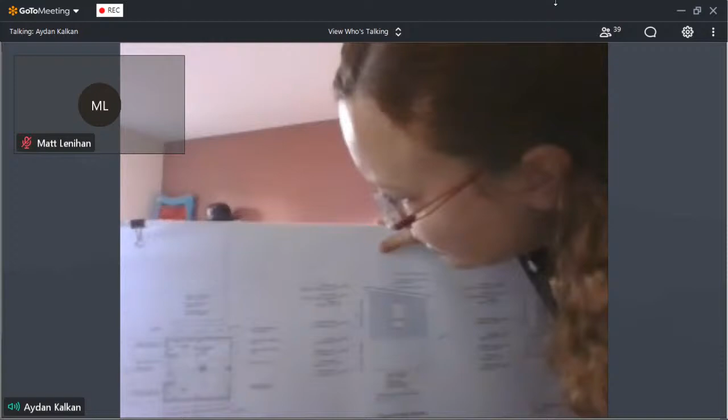And on the other side, it's 6 feet 10.5 inches. Mr. Mandel, the original old foundation is, I think, 3.8 feet. I'm trying to read this. Yes, that's the existing foundation. Right, and they originally proposed building right over that. Correct, and there was opposition to that. We were like 3 feet away from the property line at that time because we were trying to square off over the existing foundation wall.

But now the new structure over the foundation is set back so that we comply with the side yard setback regulations, which is minimum 5 feet.

Mr. Mandel, the structure that's going to be sitting on top of the original foundation, the new portion of it has been set back to meet the zoning requirements.

Yeah, it was hard to tell from the plans that they gave, but it looked like it was back from 3.8 to the 5 feet. That was the question we had last time. We had asked them to move it. I just want to confirm that it had been moved.

Based on the plans that I reviewed, they have. The original foundation is going to remain, but the structure that's being added was set back. Okay, all right.

This comment, the old shed - I took a look in the old shed underneath there. It's not fit for any storage or anything at this time, so thank you. No further questions. Okay, thank you very much.

Mr. Sweeney? Mr. Sweeney? Did we lose Mr. Sweeney? Well, okay, let me go to Mr. Dell.

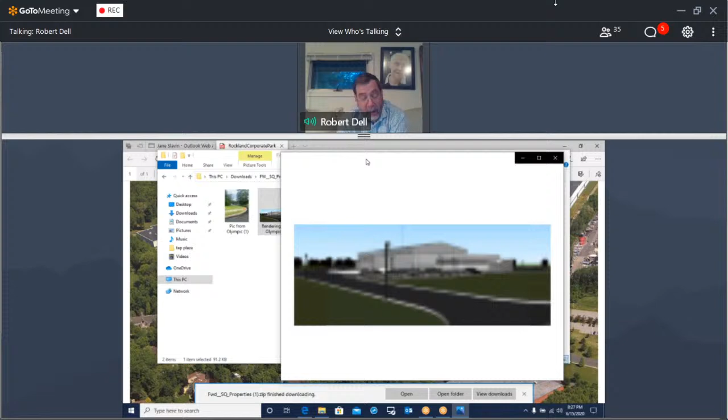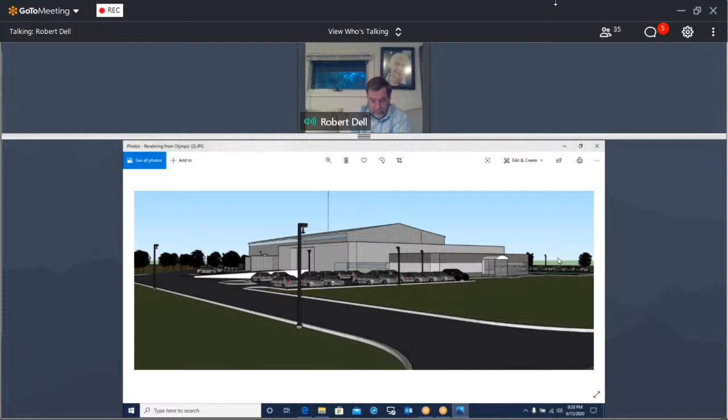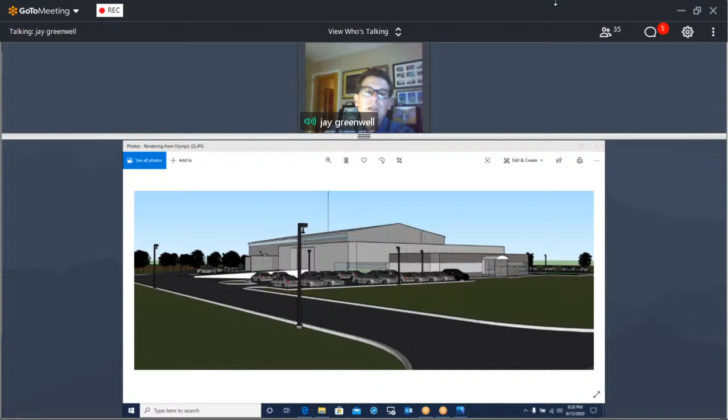Thank you very much. So just to recap, this is the rendering that was provided. The area of the screen wall I'm showing here—this is a flat rendering and doesn't provide any detail of the screening. This whole area is going to be landscaped here, and this whole stand of trees is not properly shown on this rendering.

But as you mentioned, as you saw in the aerial photograph, there you go—that other picture from Olympic right there. That again shows this whole stand of trees at the left side of the entranceway, a very narrow corridor that you'll be seeing through to the building, and very little, if any, of the area where this outside storage is going to be.

I believe you've answered the question. And I've looked at this, but this isn't exactly what we call a line of sight drawing either. But that's okay, you've demonstrated what we needed, what I needed to know. Thank you.

Mr. Andrews, questions or comments? No, I have nothing to comment now. Everything looks good to me right now. Thank you.

Oh, there's the picture right there. Mr. Dell, do you see that picture? That's the picture that they sent. This is what you see from the main road to their backyard, to behind the building.

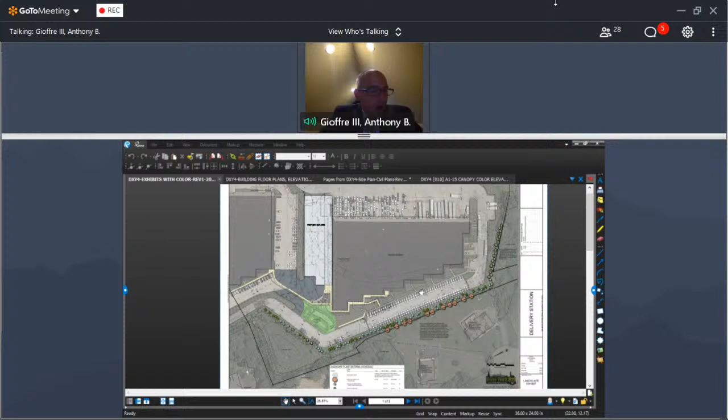Mr. Chairman, so we've appeared before you a few weeks ago, and since that time we've been working to address the comments and concerns that were raised at that time, and there's been a lot of confusion. So we'd like to take a little bit of time this evening to walk the board through where we are in the process and address some of the comments and concerns raised by the board as well as by the public. I think there are some items that have been raised that have been confused, and we want to make sure we sort out for the record the accuracy of the application before the board.

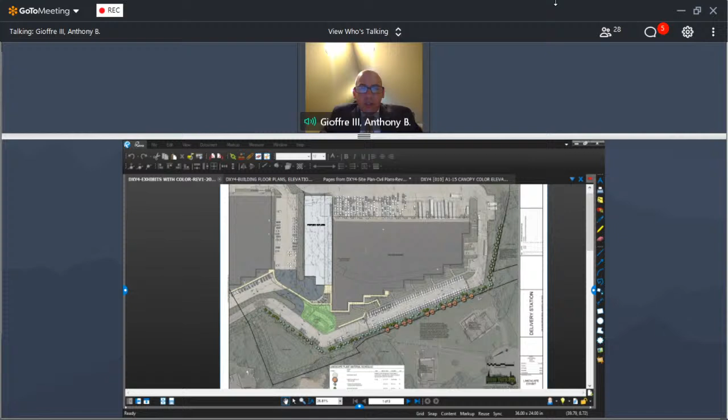As you're all aware, the ZBA granted performance standard review approval on January 22nd of this year. That approval permits Amazon's use and operation of its delivery station at the premises. The ZBA, in its consideration, looked at Amazon's proposed use and operations with regard to traffic, noise, visual impacts, emissions, and other potential impacts to the community. In approving the application, the ZBA confirmed that the proposed use and operations do not pose any potential risk of dangerous or objectionable conditions.

The application before you this evening proposes a few items: to regrade areas around the proposed loading area to provide safer, more efficient site circulation, and restriping of an existing parking area - and I want to stress an existing parking area, we'll talk more about that later. Initially the submission proposed a canopy over the loading area, situated over an existing paved area between the two existing warehouses on the site.

As will be discussed in more detail, we've been listening to the comments made with regard to this application, and now we're proposing to amend the application to change this canopy, which will now be proposed as an enclosed loading area within four walls, within a building, to match the existing facade of the warehouse. This will be in compliance with all applicable code requirements, and we believe that matching the existing warehouse building will be something that ACABOR looks favorably on.

Since we last appeared before you on May 27th, we provided the following materials requested by the board: an updated emergency circulation plan developed in consultation with Fire Inspector Bettman. We added landscaping details and line of sight data from the two properties to the west of the proposed loading area. This proposed landscaping will supplement the existing dense natural buffer between the loading area and the adjacent homes. We've also provided the requested lighting plan showing lighting levels of 0.1 foot candles or less at the property line, a significant improvement over existing conditions.

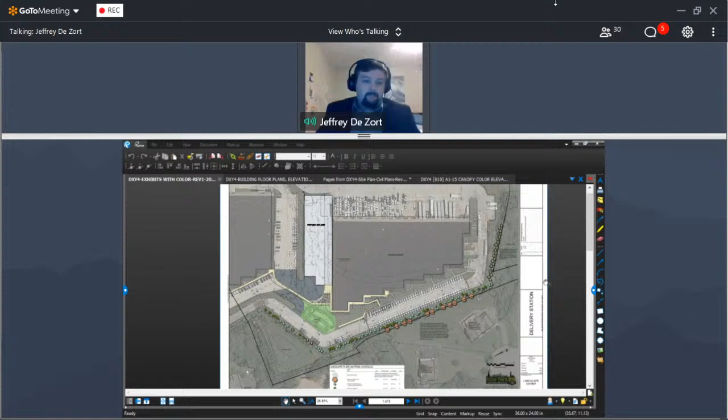First, the first exhibit that we'd like to show is an updated landscaping plan, with some aerial photography in the background to show existing screening versus proposed screening. We also show here what would be the proposed enclosed structure, where the outdoor loading canopy was previously, as discussed in our last meeting.

As mentioned, delivery vans would circulate the site into the parking. This is a staging area as delineated on the site plans, which would then travel into the proposed enclosed structure. That enclosed structure would match the architecture of the existing building. That structure has HVAC for exhaust and fire suppression, a comment that was brought up by the fire marshal.

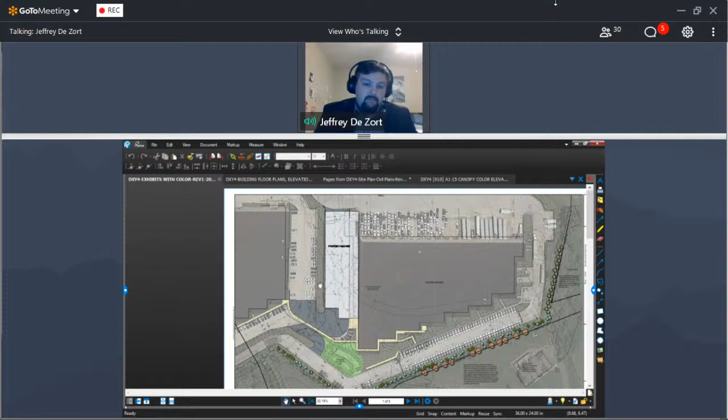These would have a high-speed door that the vans would then enter into that building. They would be staged, or loaded I should say, on the inside of the structure, and then funnel out back to Orangetown Drive, where they had always been traveling to.

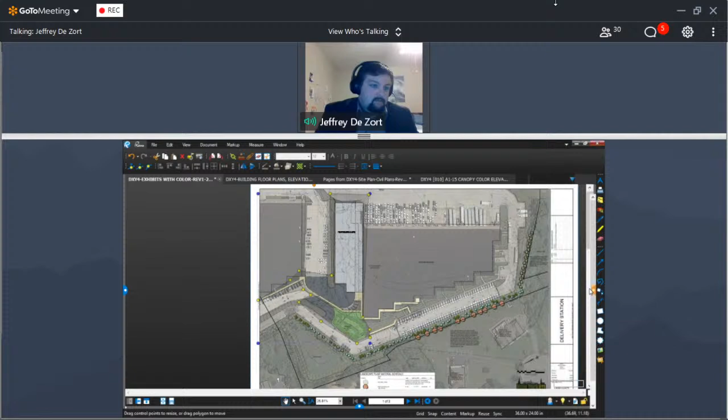As shown here, the area that is specifically colored that we had provided is the only area of disturbance that we are proposing for this project. So the limited area is more or less outlined in red in the shaded area. Included in that proposed disturbance would be a new infiltration basin for stormwater management.

Any increase, which I believe is just over or just near 4,000 square feet worth of impervious area, would be added. That impervious area, as well as all of our disturbed area, would be flowing to the proposed infiltration basin, treating that stormwater for water quality and water detention prior to discharging to an existing detention basin.

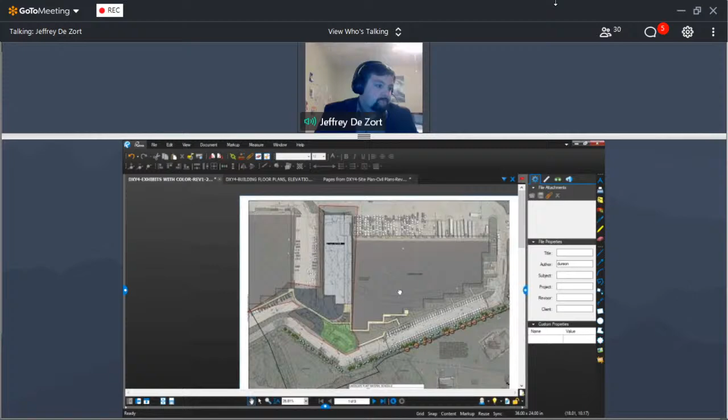As shown on the plan here, we also show the existing trees as best to our knowledge, as well as the proposed trees. And we have a schedule down here showing the proposed trees and the counts that we've added to the plan.

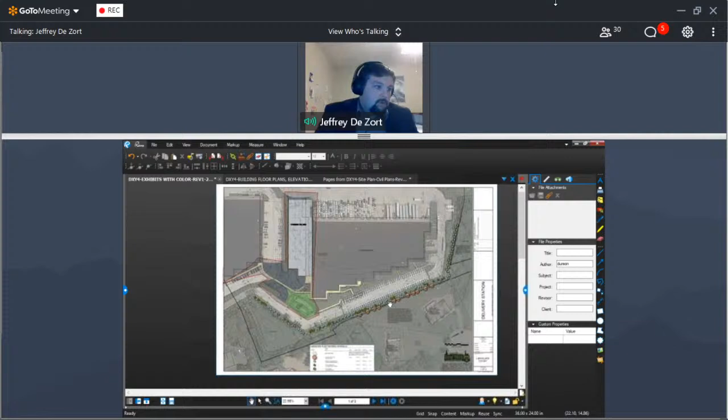Zooming out, here is the entire property, an overall site plan. Part of what was discussed at the last planning meeting was the need for additional parking, or the larger existing parking area that was to be restriped. Having spoken with Amazon about what this building has the capacity to perform, the amount of needed parking is really only in the 250 range for vans.

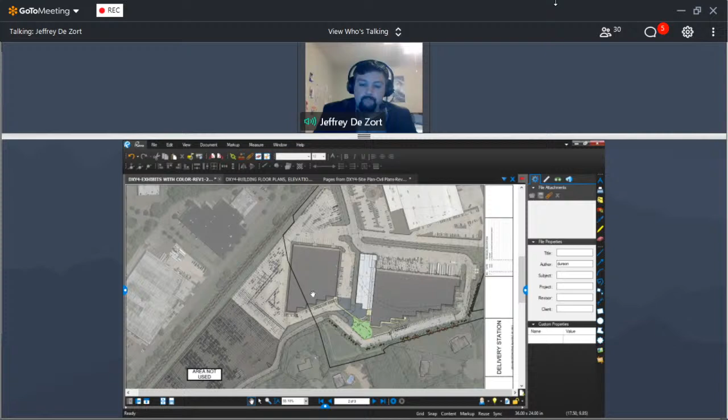So we have delineated here, more or less leaving this area not used. We wouldn't be touching it, wouldn't need to restripe it. And we would be limiting any van parking directly adjacent to the 200 building, as well as inside it. There has always been internal parking.

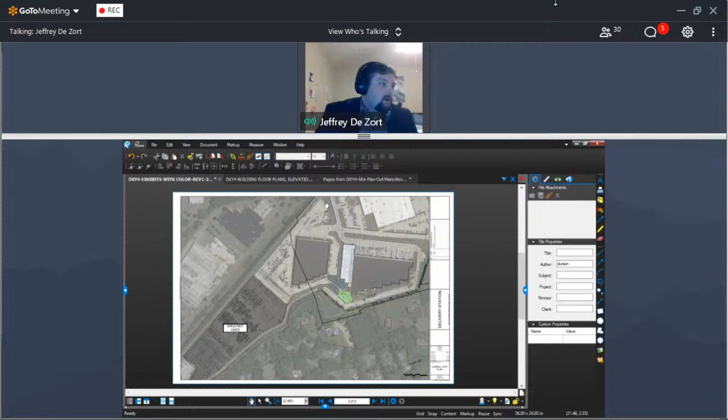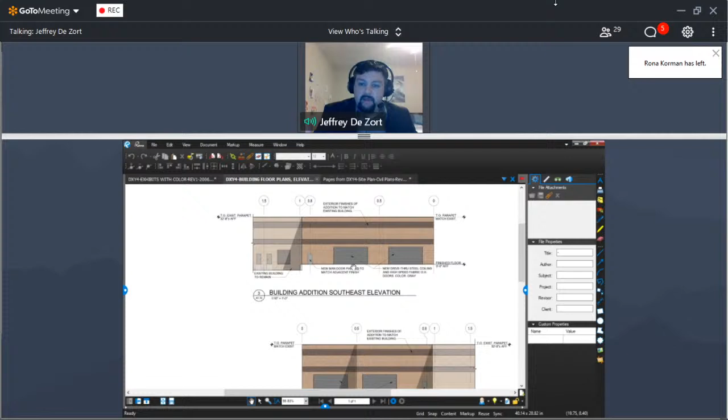Also part of our presentation, I'll show the building floor plans and elevations. This is the existing building, and we would match that existing facade. The building itself out there kind of undulates, so this would also have some of that relief built in. You can see the relief and the undulating building that matches the architecture existing out there.

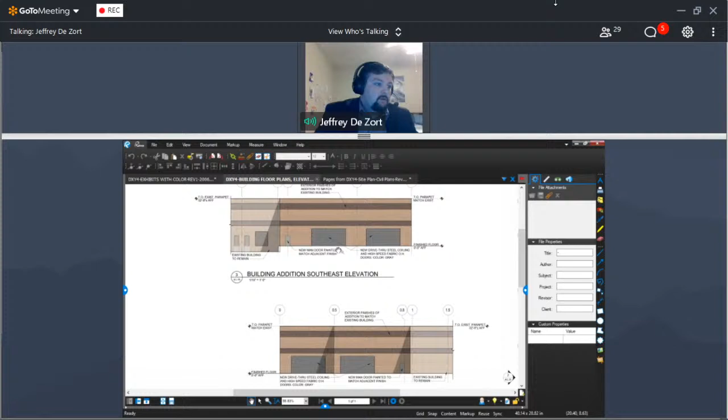Existing paint colors, high-speed drive-through steel coiling door that the vans would be able to drive into and out of.

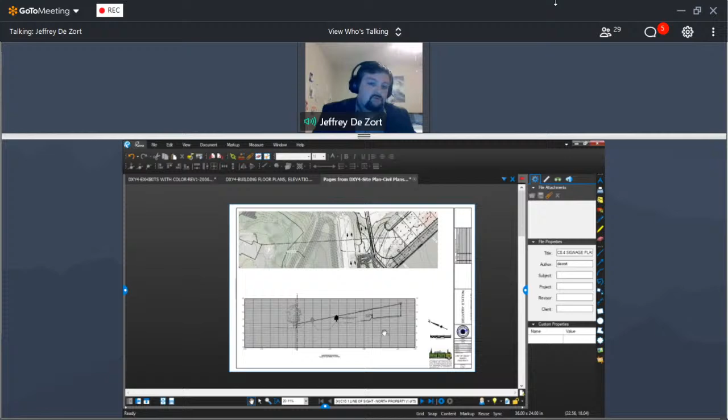Also brought up at the last planning board meeting was a line of sight provided from our existing neighbor's property line to the proposed canopy. So we prepared two line of sight exhibits. We took an average at the property line, our existing elevations, topography, as well as existing and proposed plantings, and showed at a 6-foot height a person standing at that property line and that line of sight.

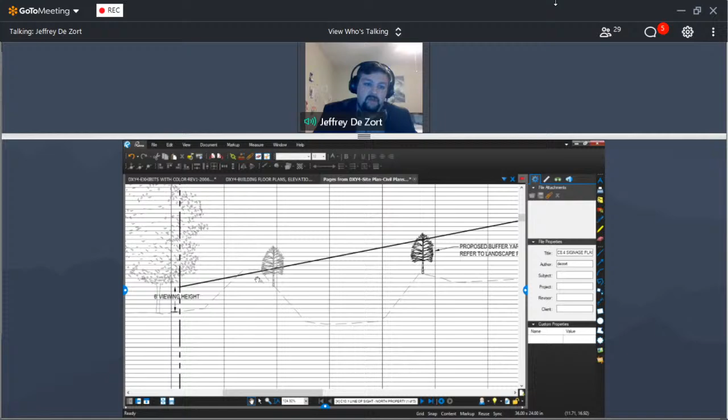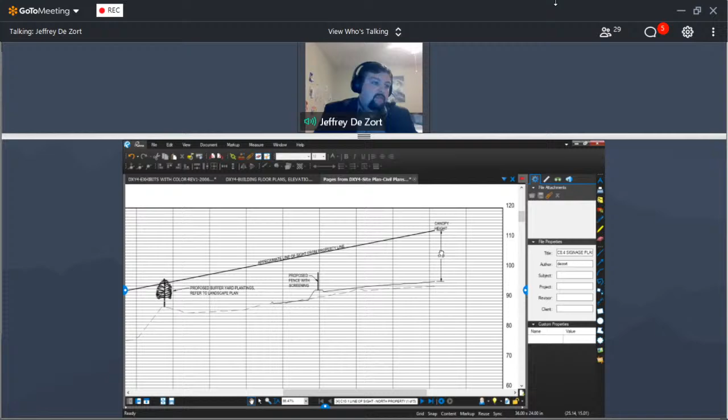As you can see in this line of sight exhibit, you would actually be seeing the top of the berm for the existing detention basin, a tree, and the second tree we're proposing as a buffer, which could be arborvitae or similar. There's also a proposed screening fence, mostly for pedestrians, to keep them outside of the loading area. In this plan it shows the canopy here, but it would be the building.

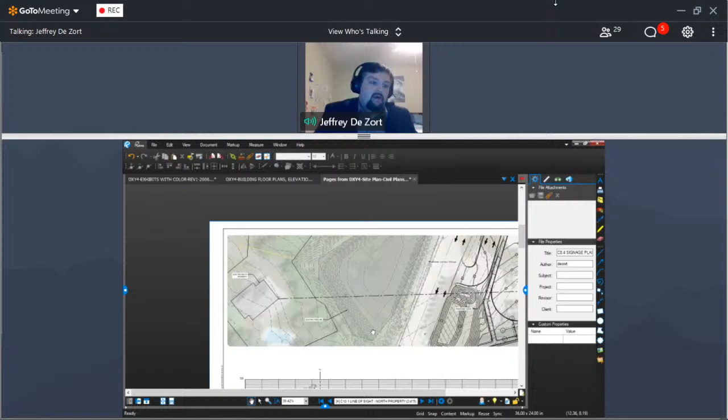So we prepared that exhibit for our neighbor here, as well as our second neighbor who would have visibility to this proposed addition. Again, same methodology, 6-foot height line of sight. In this case, we're seeing the existing trees, proposed buffer, and then the canopy.

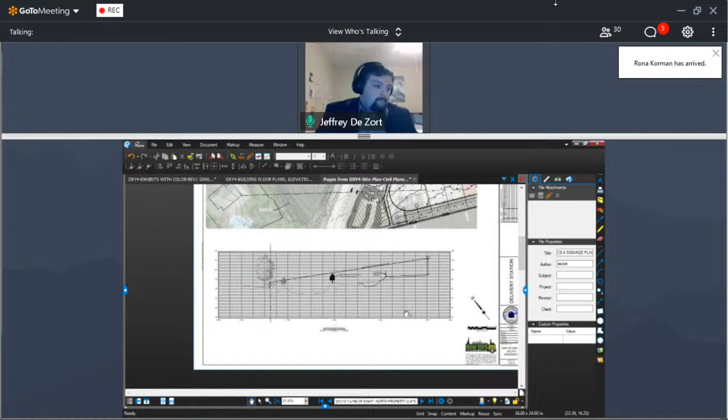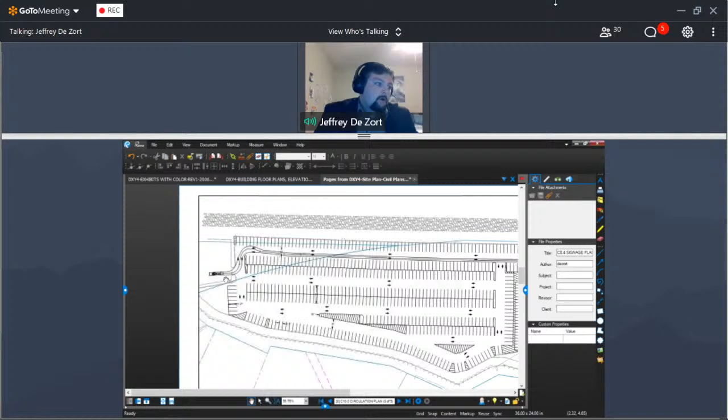As previously mentioned, we had worked with the fire marshal for traffic circulation around the site. Suggested by the fire marshal was entering and exiting for the fire truck through the gate on the west side, wrapping around and going in front of or through the drive aisle of the vans. His primary concern was in the event the train tracks here ever got blocked, being able to get to this side of the tracks. So we've shown that maneuverability throughout the site, as well as the fire truck using the emergency access drive on the south.

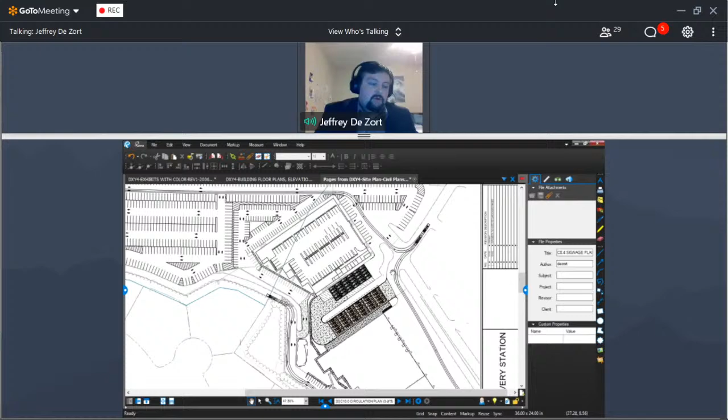So they would have access in either location. This proposed northern route, or Plan North, provides quicker access to the east side of the building.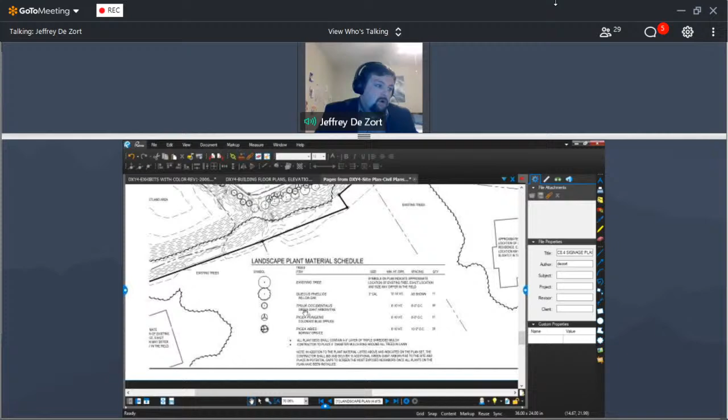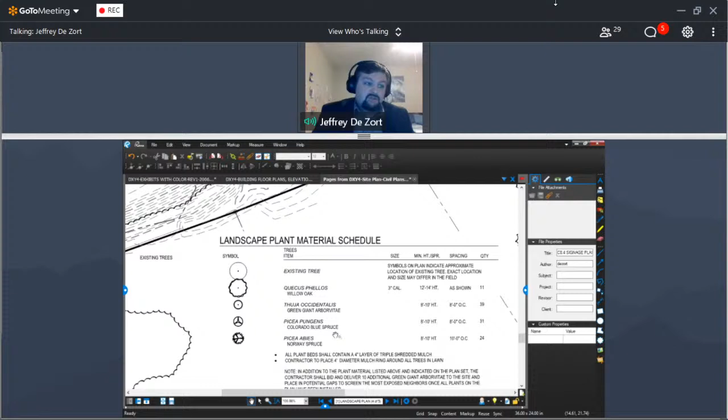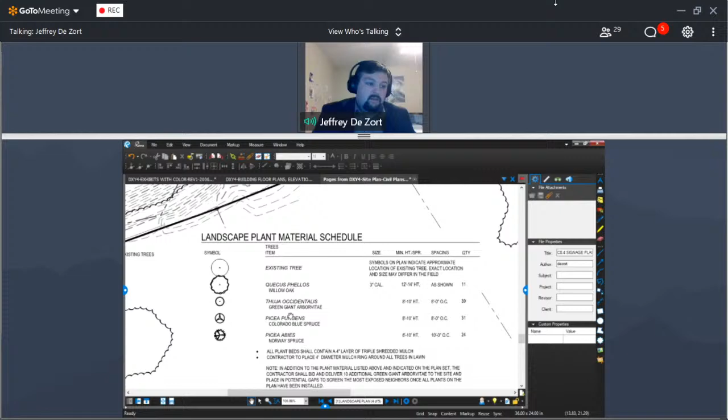Also included in our submitted plans is the actual landscaping plan, with details of the proposed species: willow oaks, green giant arborvitae, Colorado blue spruce, and Norway spruce. At the planning board and ZBA hearing back in December, a total of 19 Norway spruces were proposed, and those have been planted. In addition to those 19, we're adding 5 more, plus 31 blue spruce, 39 green giant arborvitae, and 11 willow oak. We've also included planting details and general notes in the plan set.

One other consideration was a lighting plan. We've provided a site lighting plan for the entire property. Rockland County requires a maximum of 0.1 foot candles along the property line, and we've provided a plan that is compliant with that 0.1 foot candle limit.

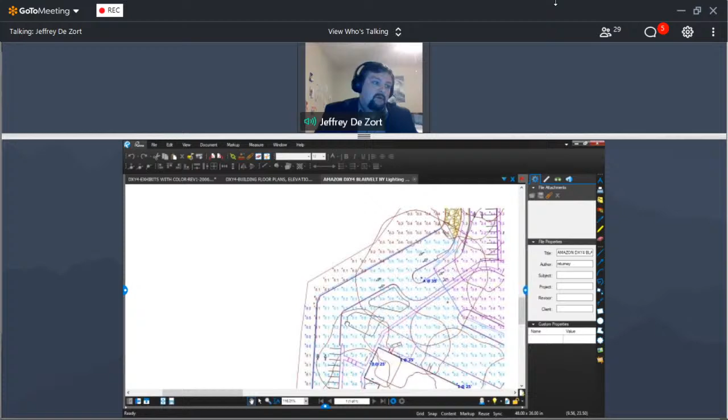Okay. I have nothing further to add or share.

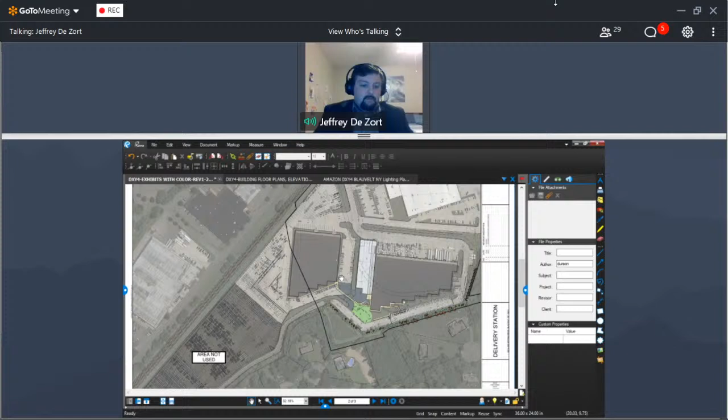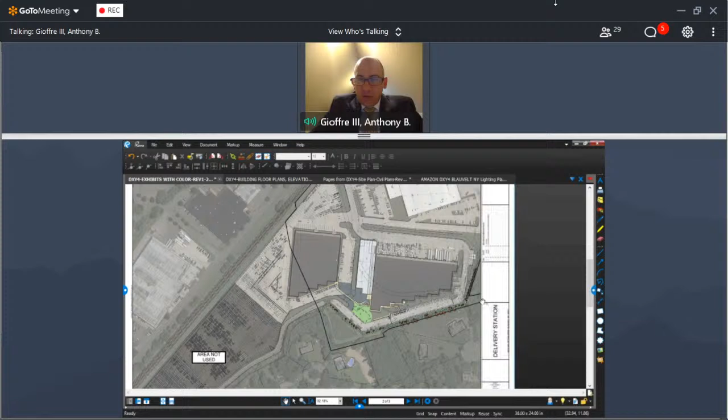Jeffrey: Tarun, is there anything you'd like to add in connection with the proposed trips and operations? Tarun: Sure, thanks Jeffrey, and thank you to the board for letting us speak at this venue.

I wanted to clarify some of the discussion on van counts from an operational perspective. Like any other operation, we have a maximum capacity that these buildings can operate in. This particular site has been designed for a max van trips of 175 to 180. What that means is that for most of the year, this facility is going to operate at a van count of way below 160, and during the 3-week period between Black Friday and Christmas, which is our peak period, we expect it to reach between 170 and 180. That is what we expect from a van count number.

I also want to emphasize the timing aspect of it. When we talk about van trips in and out of the building, this is all going to take place in the off-peak hours of traffic. Van dispatch does not start until 10 a.m. and it gets over by noon, so the number of trips combined with the timing of these trips is likely to not have any major impact on traffic from the van dispatch. And the van comes in much later in the day, like 7:30 p.m. onwards in the night, again not having any major impact on traffic during those off-peak hours.

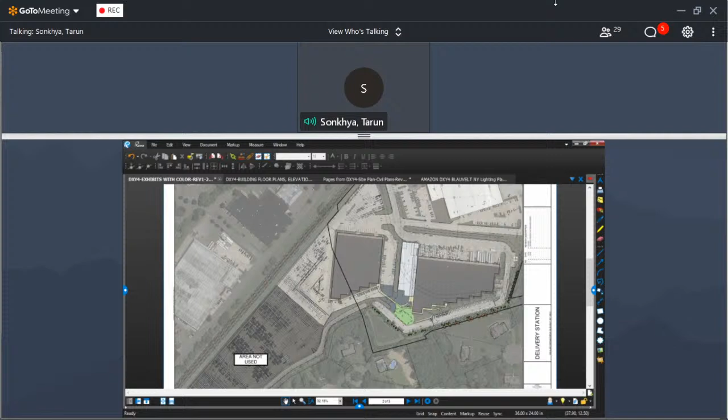One more detail to add: the site has the capability to dispatch only about 90 vans an hour, so if you think about it, the max we can dispatch in a 2 to 3 hour loading time is basically around 180 max. That's what we are planning to do with this site as well. That's all that I wanted to cover, and I again appreciate the time from the board.

Thank you, Tarun. Mr. Chairman, we certainly appreciate the opportunity to present to you. We wanted to make sure that we clarified some of these items which we believe were confused previously, and we'd be happy to answer any questions that you do have at this time.

Thank you very much. I think you clarified a lot of issues that all the board members have. Let me go through the consultants' reports. I think the majority was read in last time, but let me just go through and we'll see what happens.

Jane Slavin, Office of Building, Zoning, and Planning Administration, June 15th, basically the property history. One of the things you had said in respect to the ZBA's decision is that it was further resolved that the applicant shall return for additional performance standards reviews of operation at 400 Orient Drive prior to expanding to full use of 400 Orient building, and still further resolved that the applicant shall first utilize the loading docks at 400 Orient furthest away from the adjacent residential neighborhood.

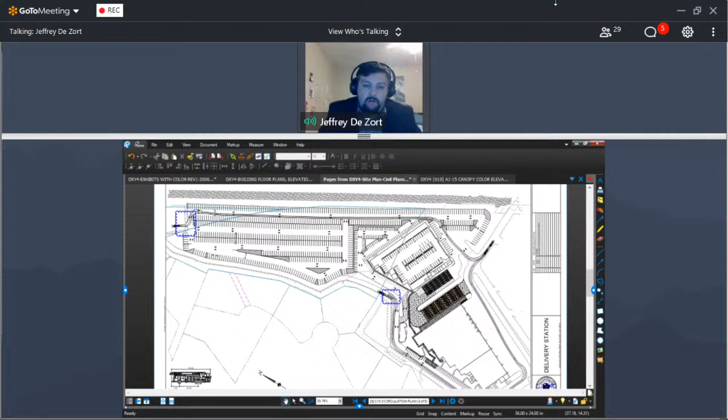And no filtration? I'm not aware of one. I'm not sure what filtration, if it has any or not, so I can't speak to that. Oh, okay, thank you, appreciate that.

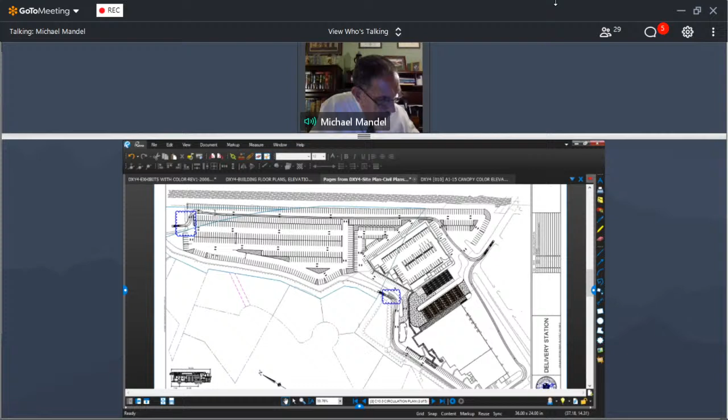We talked to the fire department, that's all changed. Okay, that's all I have at this time. Thank you, and I'll wait for public comment about any additional questions.

Thank you, Mr. Chairman. Thank you, Mr. Mandel. Mr. Sweeney? Yes, I'm here. Can you hear me this time? Yeah, we can hear you.

Okay, great. Thank you. So thank you to the applicants for addressing a lot of the questions we brought up last time. Unless I missed it, I had one question that I heard last time that I didn't hear an answer this time. I'm looking at Michael Bettman's memo from May 22nd. One thing he said was that the canopy, which now I guess is an enclosed space, would require a fire suppression system. I didn't hear anything about that in discussion to this point.

Did I miss something, or do you have an answer for that? So we're proposing a fully enclosed structure right now that will be sprinklered. Okay, and does he approve that plan to have sprinklers in that area as opposed to foam or other types of fire suppression? I believe he requested it in another letter, right?

Mr. Sweeney, if I can interject, that would be during the building code review, once they submit their full set of construction plans, which comes after. Okay. They would have to meet New York State Building and Fire Code. That's what he's referencing.

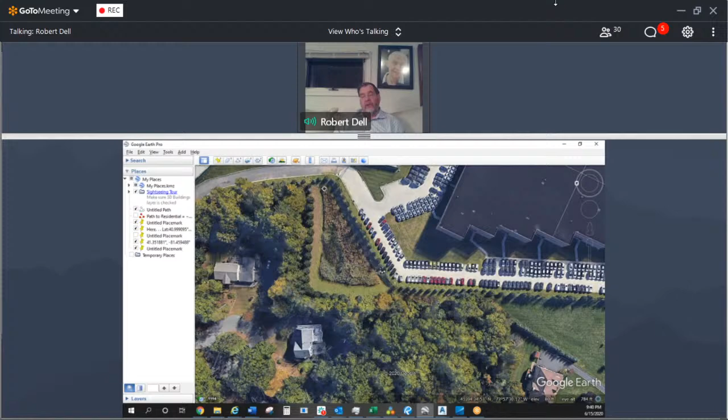But again, do check on this. If you're saying you're coming back again, then I assume you want this to remain a preliminary and you're going to ask for a continuation, or are you trying to get preliminary tonight? I don't really understand.

Oh, we would love to get final tonight, but I don't think that's going to happen. No, I'm not even talking that, I'm talking about preliminary or keeping it. No, I understand, I'm just making a joke. No, I understand. I think we should hear from the rest of the board members, if we'd like to move this along as best as we can, obviously.

If I can comment, I believe there is a policy in the building department relating to late submissions, and since this just came in today, I believe there probably will not be a possibility of going for a preliminary tonight. Jane, is that true?

Your mic's not on, Jane. Rick, agreed, we typically will not accept any submissions closer than a week before, so that we have time for the public to be able to review anything that comes in. It was a very good presentation, thank you for clarifying a lot of information. However, this information needs to be provided to the public in a timely manner so that they can review and comment.

Yes, and it also needs obviously to be provided to the board members, so they're not here at the last minute or 3 hours before a meeting having to make a very important decision with no time for reflection and inspection. But yes, if that's what's going to happen, I think that's fine. And I'd defer any other comments until after the public speaks.

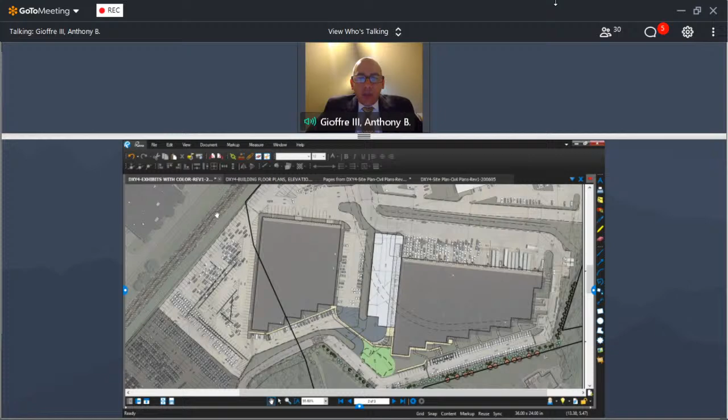Yes, and to clarify again, Mr. Mandelbaum, who's here this evening as the attorney for Onyx, in our last submission submitted a June 9th letter which we included with the plan. For the record, as shown on the drawing, the low clearance bars would be hinged to allow for emergency access and snow removal maintenance vehicles only.

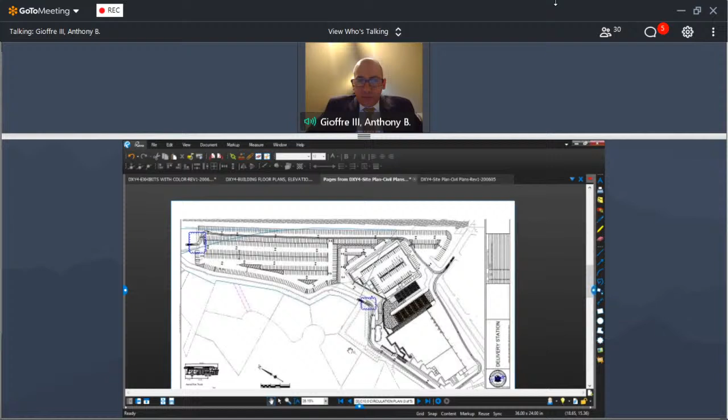Right, but in your presentation tonight you were saying you are not relying on that, that you are installing a lockbox at the northeast part of your property, right there. That's where the fire apparatus will be coming through, and that'll be a lockbox.

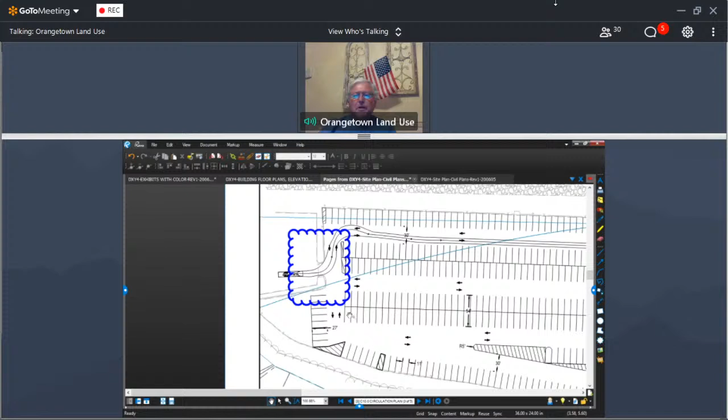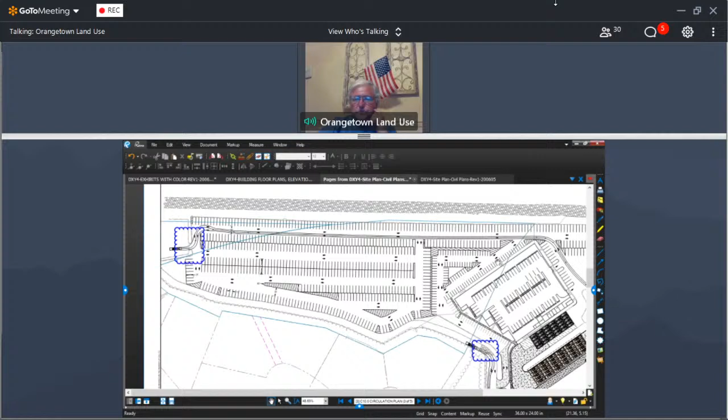Okay, and then they will just drive through the parking lot parallel to the railroad tracks. If you see at the upper part of that picture, that stripe there, that's the railroad tracks, so it'll be running parallel to them, not an emergency road at all. As long as they're not going to try and go through those bars - I didn't realize they were swinging or anything like that - that clarifies my question.

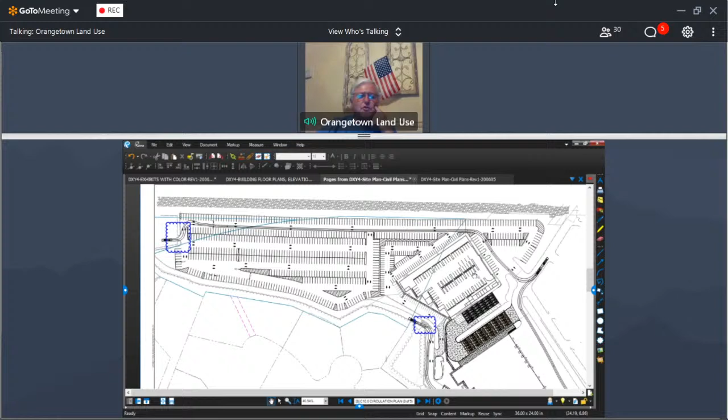I appreciate it, and thank you. Okay, Mr. McCrory, questions or comments? Yeah, just a couple questions and comments. It's a better plan than we had last time, it answered a lot of questions, hopefully it answered a bunch of questions that the public had.

Because when we look at the plans, we always make sure the needs of the public and surrounding areas are fully considered. The trip outs you mentioned were from 10 a.m. to 12 noon. What happens after noon? Is there a lull in the action, is it no one's coming in for a while until everybody gets back from the deliveries?

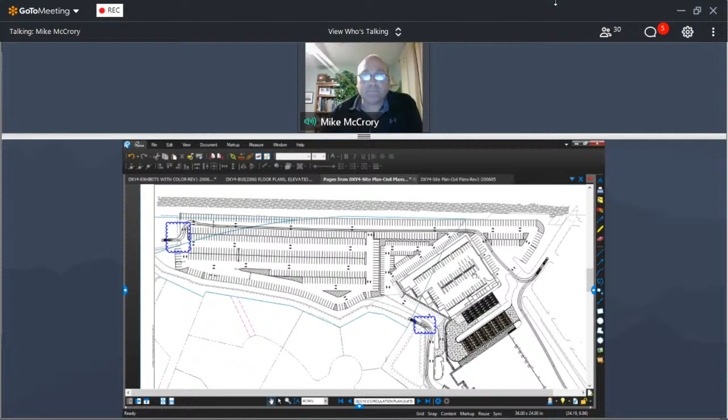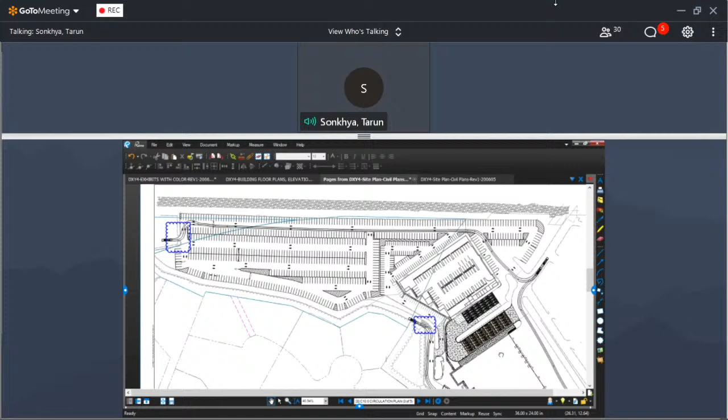Yeah, I can take that. So once the delivery drivers go away, there are pretty much 20-25 associates in the building. We have a one-day delivery component, and they basically sort the packages and prepare them for our flex drivers - about 20 to 30 personal vehicles, drivers that pick up packages from the site and deliver to the nearby community in a shift of 3 to 4 hours. The associates at that point are preparing packages for those drivers to come in and pick up.

The thing to keep in mind is these personal vehicles or flex drivers have their own personal vehicles, so they do not have to return back to the site. They come in the site once, pick up 5 or 10 or 15 packages, and then just leave and not return back.

And what's the time frame that takes place, is that all day? No, that's between around 4:30 p.m. and 6:30 p.m., but the amount of trips is almost negligible, it's 20 to 30 vehicles. Is that included in the 160 number that we heard, or is that extra? No, 160 is the van traffic. So another 30 plus is personal car traffic?

Yeah, another 20 to 30 personal flex drivers, and then Jeff, I don't know if you have the traffic study itself open. But yeah, that's what they do during that time.

All right, I just wanted to clear things up for next time. I see you added more screening, which is good, and I hope you guys take into account what the other board members said about sound barrier, oil separators, and the HVAC filter. That'll address other concerns the neighbors have about noise pollution and water pollution, and that goes a long way to keeping the neighbors happy and the board happy. So I appreciate the changes and look forward to more. Thank you, guys.

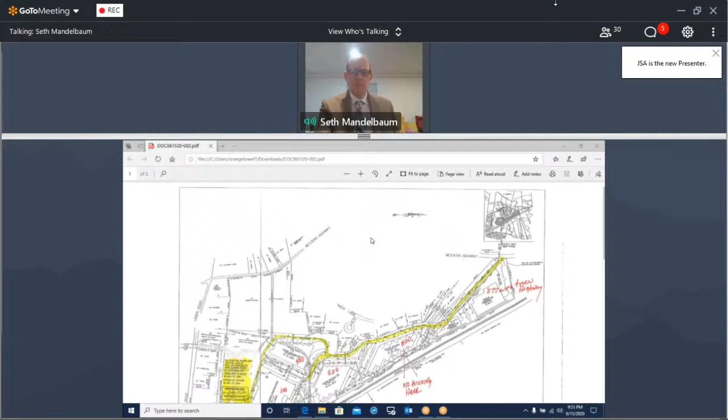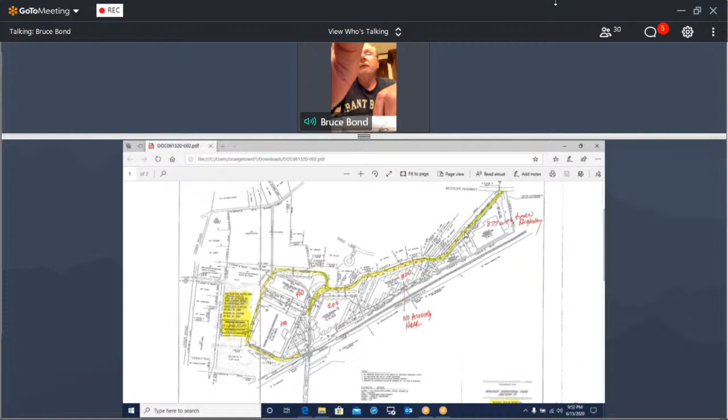Okay, wait, I'm just looking at something right now, hold on just for a second. Mr. Chairman, I just shared one of the approved maps. The yellow highlighted area shows what was the access road. Everybody see that? Down closer to that building, to the left of my screen, along that road there's a gate there - before you get to their parking lot.

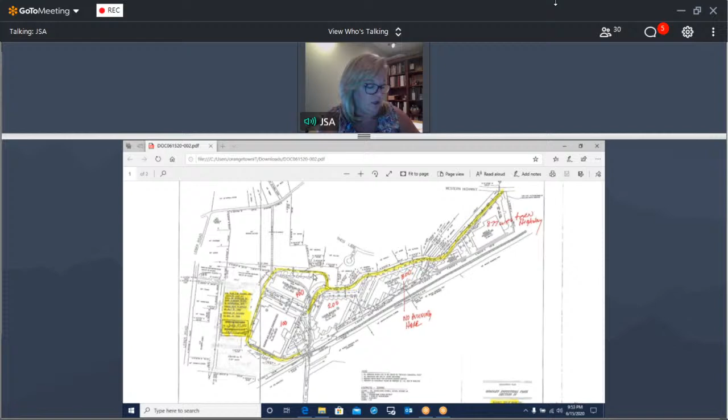There are a number of decisions that I read through, which obviously everyone knows this is a very long history with this project. But in 1995, a planning board decision stated that, consistent with past decisions, trucks should not exit on Western Highway, the two-lane county road. All truck traffic entering and exiting the site should use the four-lane state highway Route 303 via Bradley Hill Road. There should be no access to Lieber Road except for emergency vehicles from this project. So the yellow represents what has been the emergency road. My understanding is the representatives from Amazon and Onyx, working with the fire inspector, came up with that alternate road as well. But I believe the idea was always to keep this road closed to cut-through traffic.

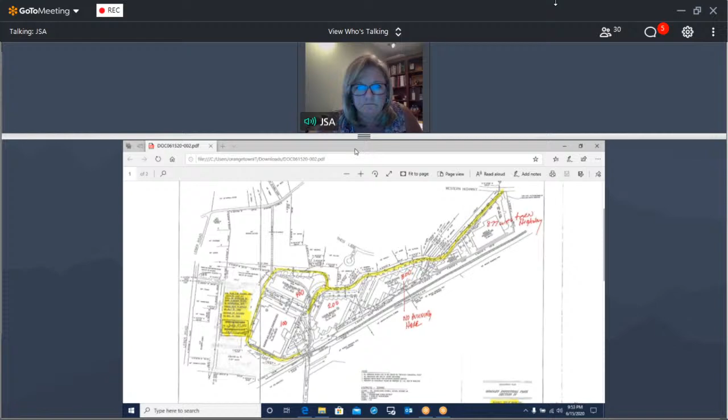Right, but we're not doing that - you're still allowing cars to go through. Without the gate, there's going to be cut-through traffic there whenever they want.

You know, that's what I don't get. Why that was what was proposed last time they were in. They were talking about that. And now it's changed, you know.

Andy Andrews here. I concur with Bruce because the last time I visited there, I had parked my vehicle alongside the road to take some pictures and look at some of the postings, and I almost got run over by a truck. And it wasn't a little truck; it was a big truck. And that gate was open. I went right onto Western Highway. That gate was wide open.

I concur with Mr. Bond that there's also cars going through there too. Right, so I don't understand why, if the new buyer was not made aware of that, you can understand how that happened. So I think now they're becoming aware of the fact that that was always meant to be only an emergency access road, and that would need to be addressed.

We need to address it as part of this. I think we need to look into this on behalf of ownership. I know certainly commercial traffic, my client, I think, would be amenable to looking into that. But since we know we're coming back with Amazon to address any other open issues from Onyx's perspective, rather than try to answer this question at this exact moment, we prefer to do our research, look at what Ms. Slavin is referring to, and make sure we give a complete, accurate answer for the next meeting. And I'll defer back to Tony Giaffri on the rest of the issues.